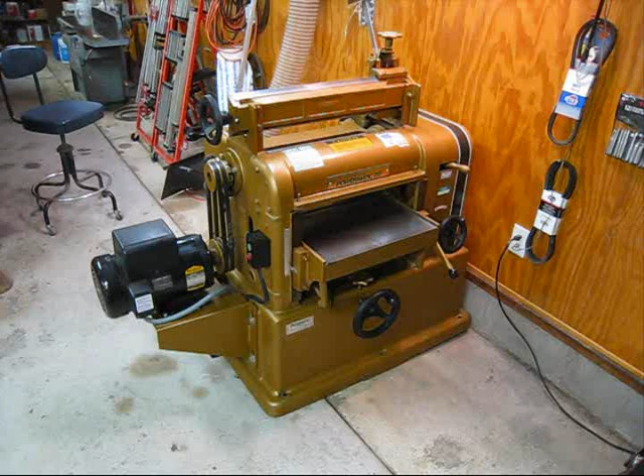Today I'm going to make a video showing how to adjust a Powermatic Model 180 18-inch planer. I recently went through this planer and set new bearings in it. I pressed new bearings on the cutter head, which meant disassembling the machine, taking the cutter head out, pressing the bearings on, and taking the blades out. So the machine's all back together, the new bearings are in, and I just set the knives and sharpened them with the knife sharpener.

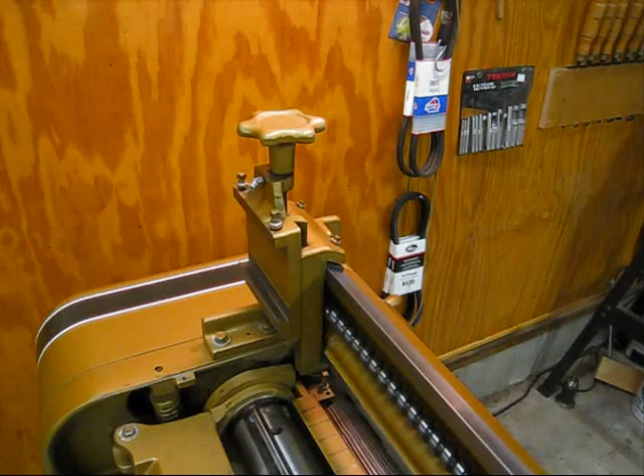So now it's time to go through and adjust all the settings. Every time I sharpen these knives, I have to go through and adjust the settings because it changes just a little bit. That's what this video is about. I'm going to show the different adjustments you can make on this machine to get stock running through there real nice. So I'll take you over to the bench.

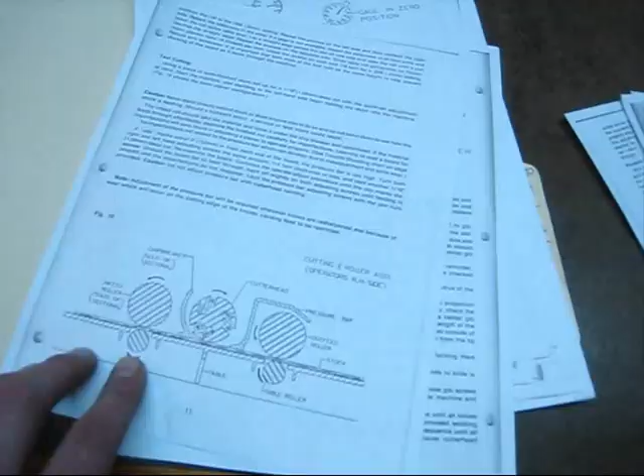I have an illustration here to show you. There's an infeed roller, and the stock goes through this way: infeed roller, chip breaker, cutter head, pressure bar, and then the outfeed roller. There are also a couple of idle rollers on the bottom, or table rollers as they call them. And then I have the settings over here, so I'll take you through step by step and show you how to adjust those.

If they're not adjusted right, you can have problems with stock getting stuck in there, having excessive snipe, or not cutting right. Once this machine is all adjusted, it really cuts nice. It's a really nice planer.

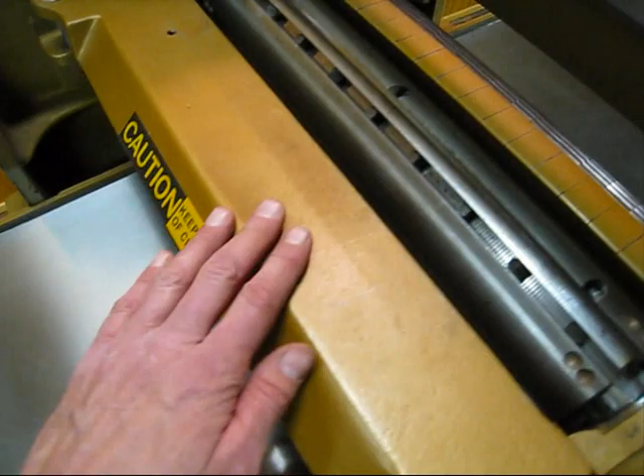So I'll show you here. This is the segmented infeed roller—some of them are solid, this one happens to be segmented. And then here's a segmented chip breaker, the cutter head with the knives in it, and then the pressure bar, which is a casting that extends down right down here. And then the outfeed roller.

Also, the first thing I'm going to adjust is this table, and I'm going to show you how to do that. So I'll stop the camera and get set up, okay?

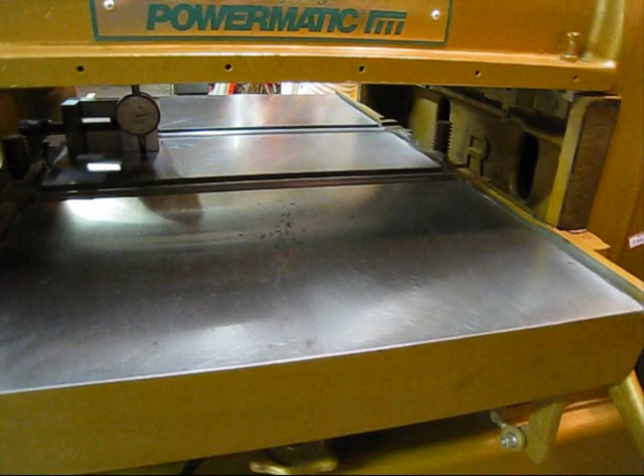Okay, the first thing I'm going to adjust is the table. I want the table to be parallel to the cutter head and the knives. I haven't checked this for a while, but since I replaced the bearings and there's new knives in there that I sharpened, I wanted to check. It wasn't off by very much—about 0.003 from side to side. That's really not that much, but I wanted to go ahead and adjust it anyway.

And I ended up adjusting it the wrong way, so now it's like 6 or 7 thousandths off. I'll go through and show you how to do that.

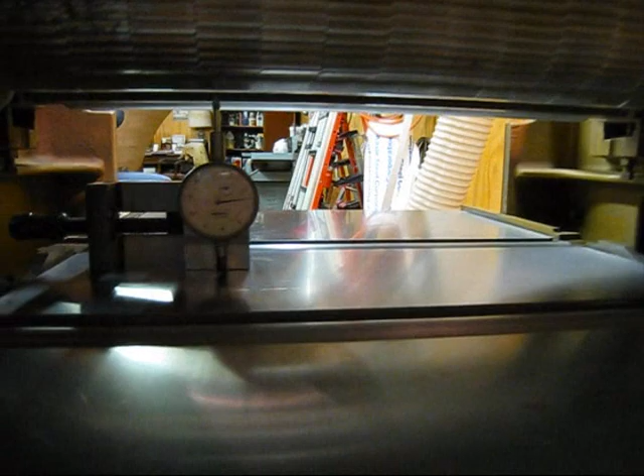I have a dial indicator, and I just have it mounted to a little machinist vise. I'll hopefully get some light in here to show you. What I'm going to do is measure the very bottom of the tip of the blade from side to side. Now the blade doesn't necessarily have to be right at the bottom of the arc, as long as the cutter head doesn't move when I take those measurements.

So what I'm going to do is get the blade where it looks like it's at the bottom of the arc, and then just put a little wedge in that pulley there against the indexing housing, the plunger here, just so it doesn't move, and then take readings from side to side. So I'll get set up and get some light in here, and I'll start the camera, okay?

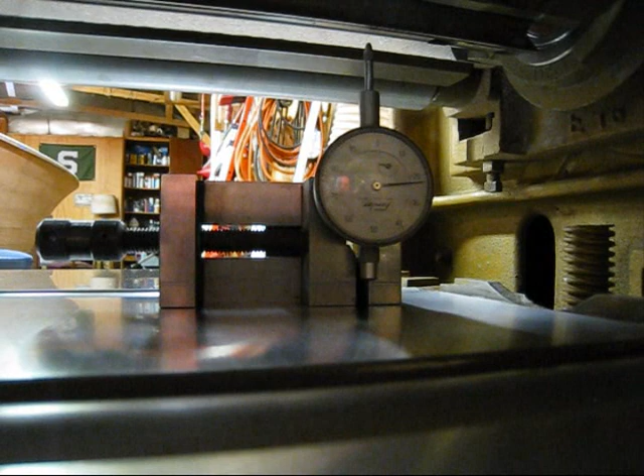Okay, I have the dial indicator set up on the right side, and the cutter head is fixed with that little wedge, and the blade is near the bottom of the arc, but it's probably not exactly the bottom—that's okay. As long as that cutter head doesn't move as I take readings from side to side, it'll be okay. Now, I adjusted it again and went the wrong way again, so it's off even more than before.

I think it was off 6 thou before, now it's like 10. So I'm going to try to get it right this time.

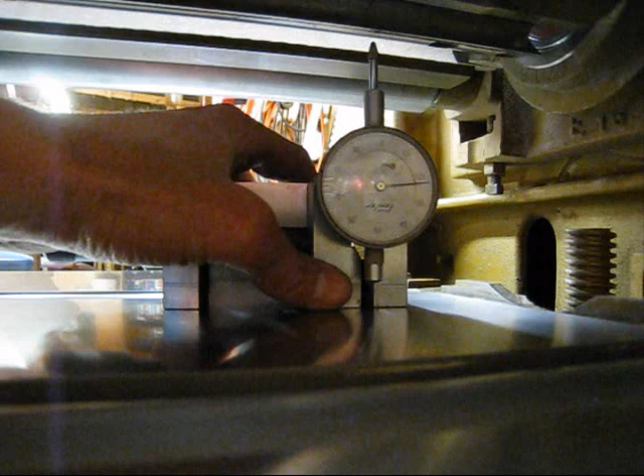What I'm going to do is first raise the bed a little bit until I engage this plunger. Then I'm going to drag the plunger across the bottom of that knife, and we're going to see what the gauge bottoms out at.

Looks like about 78, 79, right around there. So I'm going to slowly move this to the other side. Let's say that was 78.

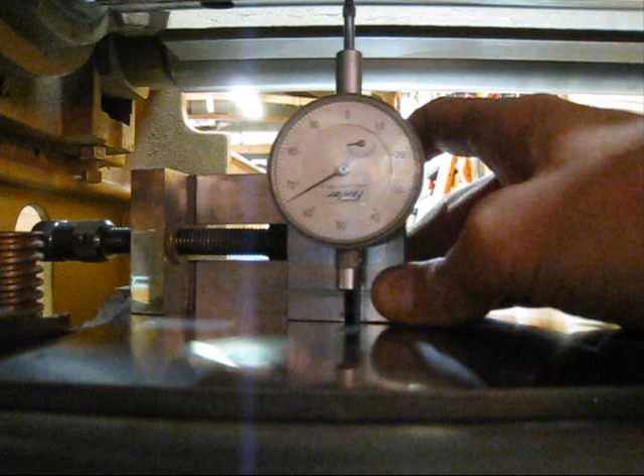Now I'm going to drag it across the bottom of the knife on this side and we'll see what it is. See, that's 68. So this side needs to come up. If I put that at 78, and this side came up, then it would touch there. So I need to either bring this motor side up 10 thou or this side down 10.

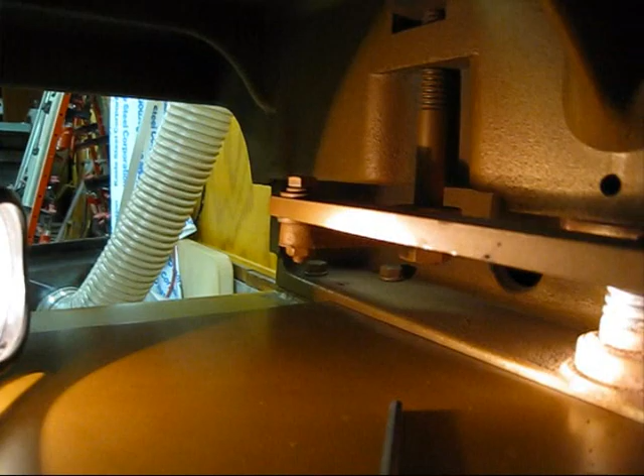I'll stop the camera and get set up to do that. Okay, I'm going to explain how to adjust this bed. I'm going to take the camera under here and show you. This entire table is resting on 2 Acme gears. That's how you raise and lower it. It's the same on the other side.

Right here there's a set screw. If you can see this collar down here, that collar is probably flanged and it probably goes up into this casting, with a set screw right here. Then there are some holes, I think 4 total in this collar, that you could stick a bar into and adjust it. So the first thing I'm going to do is loosen the set screw, and then I can put this Allen wrench in here and adjust this collar up or down.

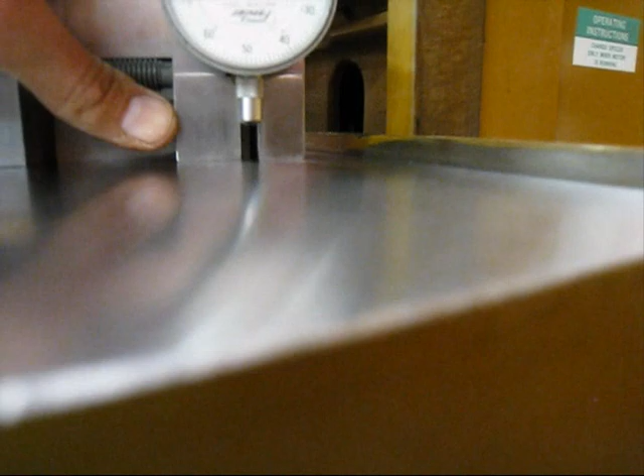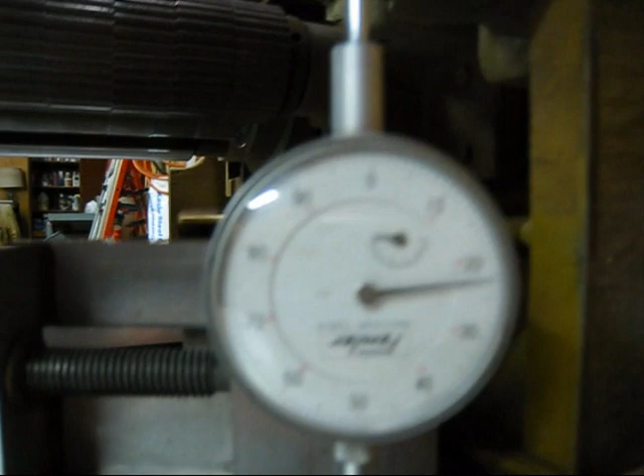But before I do that, I want to set the indicator. I have it set out here because it's easier, and I'm going to raise the bed. Now I'm just going to measure some arbitrary point on the right side of this, and I'm going to raise the table up until that engages. There we go.

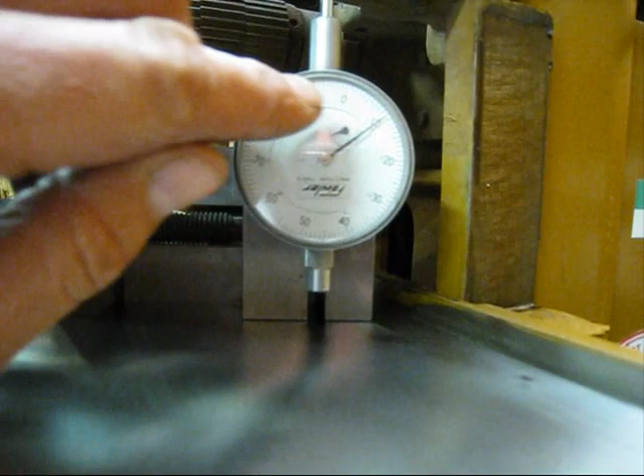I have to drop this side 10, so I'll just set this to 10 right here. That needle is going to move backward, and once it hits 0, that's my adjustment.

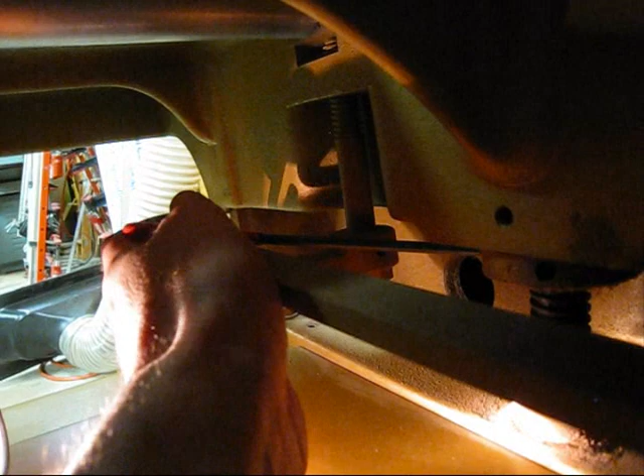So what I'm going to do is go under here, break that set screw loose, and put this Allen wrench in. There's another hole on the other side, because I don't think I can do it from this side. Okay, and I'm going to move this, start moving it until this needle drops. I'm going to set the camera right here.

And when that needle starts to move, I'm going to start adjusting it. Okay, there it goes. I'm going to slowly move it until that gets to 0, and it's dropping the table. Right there.

Now I'm going to go in here and just tighten that set screw, watching the needle to make sure it's not moving. Okay, so that set screw is tight. The needle moved just a touch, but it's pretty close.

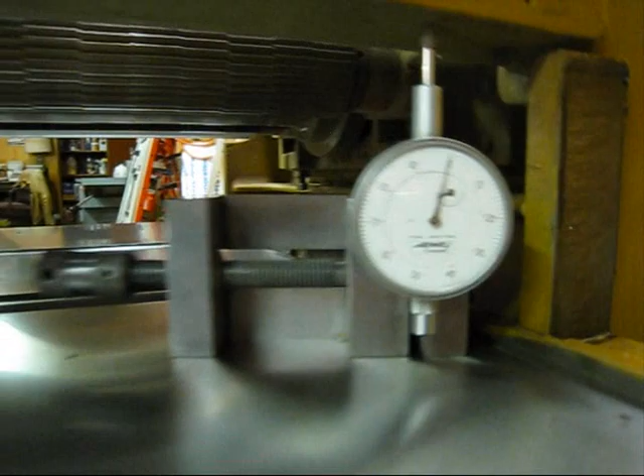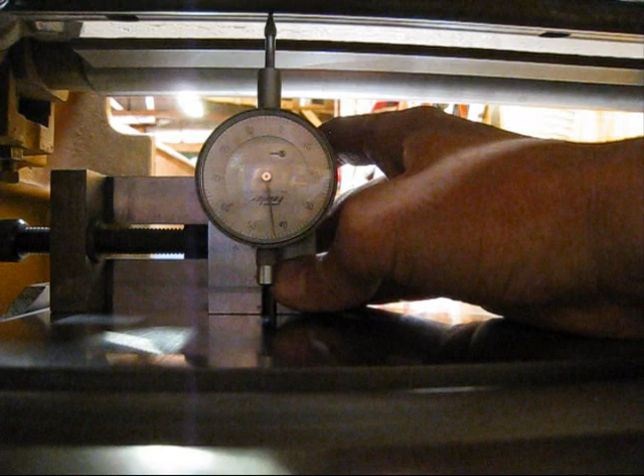I'll stop the camera and then we'll take our readings again from side to side. Okay, I have the indicator set back up. I'm going to take a measurement on this right side, dragging the plunger toward me so it hits the knife, and we'll see what it reads. Right there, starting to drop, 52. I'll slowly drag this over, and then we'll do it on this side. Just under 53, so that's it, within 1 thou from side to side.

So that's how you adjust this bed. I'm just going to go down there one more time and make sure both of those are tight. And now the bed is parallel to the cutter head and the knives, okay?

Now that the table or bed is parallel to the cutter head and knives, it's time to make the adjustments. There are 4 things I'm going to adjust: the infeed roller, chip breaker, pressure bar, and the outfeed roller. On my machine I happen to have a segmented infeed roller and segmented chip breakers; some other machines have solid ones. I usually do it in order: the infeed roller first, then the chip breakers, then the pressure bar and the outfeed roller. The reason, at least for the infeed roller and chip breakers, is that the chip breaker actually rests on that infeed roller, so you want to adjust the infeed roller first.

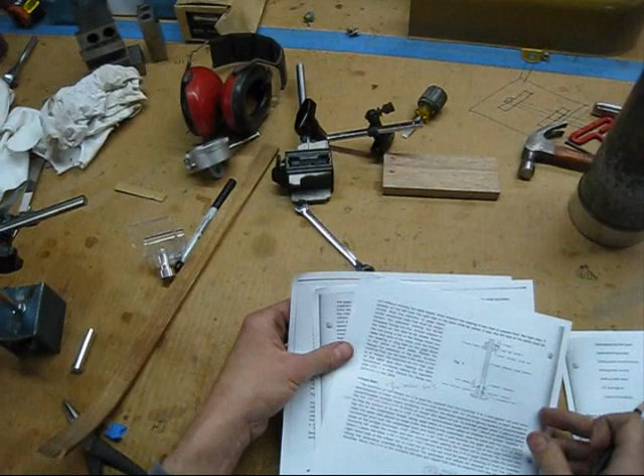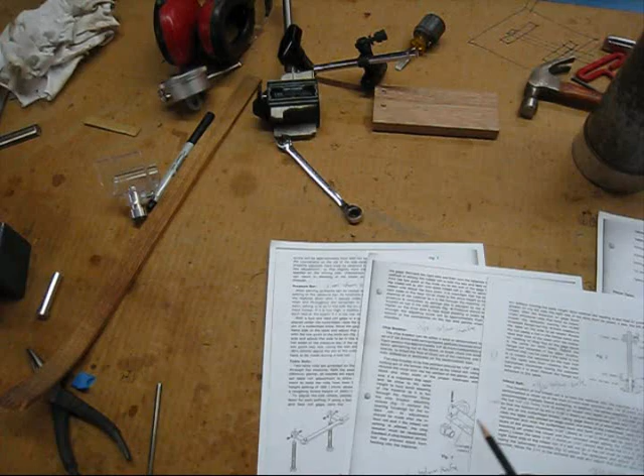So I'll take you over to the manual here. There are 4 things I'm going to adjust, starting with the infeed roller, chip breaker, outfeed roller, and pressure bar. The infeed roller, outfeed roller, and chip breaker are all going to be set slightly below the knife, the very bottom arc of the knife. The only thing set just slightly above is the pressure bar, about 1 thou above the knife. So everything has give to it except that pressure bar. The infeed roller is mounted on springs.

See that it's mounted on springs. And the chip breaker, these individual, sectionalized ones, they're also mounted on springs, and could also be lifted too. So that's got give to it. And then the outfeed roller has give to it. The only thing that doesn't is the pressure bar, and that's probably the most critical one.

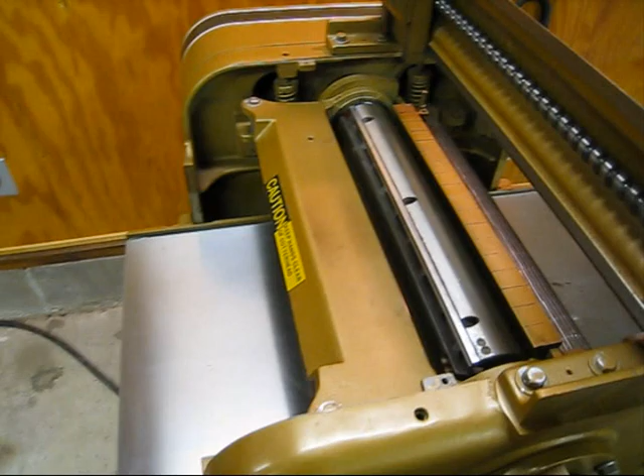I've read articles where if something's going on with the machine and it's not cutting right, usually it's the pressure bar that's not set right. The pressure bar's job is, as the plank comes through here and passes through the cutter head, before it gets to the outfeed roller, the pressure bar holds it down until that outfeed roller can pinch it and pull it through and hold it down to the table.

So if this is set too high, you're going to get a washboard effect on the plank. And if it's set too low, the plank will just stop - it'll hit it and just stop. So you want to set the bottom of that just slightly above, like 1/1000th above the cutter head, or the knife, at the lowest arc.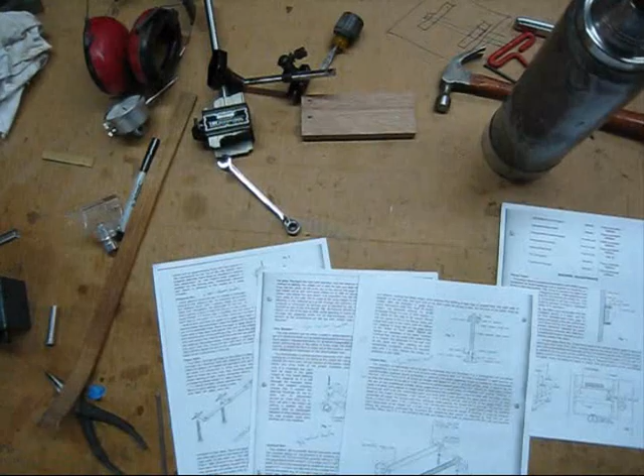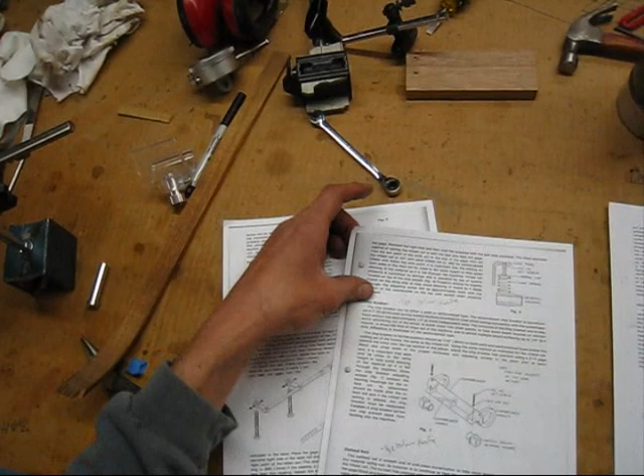So we'll talk about the amount of adjustment. The infeed roller on my machine, with the sectional infeed roller, is going to be set 1/16th below the knife. On a solid one, it would be 1/32 - it says right here on the solid types, 1/32. Then the chip breaker, that's also going to be set 1/32 below the knife.

Outfeed roller, same thing, and again that has a little bit of give to it. The infeed roller and outfeed roller have give, as well as the chip breaker. And then the pressure bar is going to be 1/1000th above the bottom arc of the knife. So that's the specs. The first thing I'm going to do is adjust this infeed roller. So I'll stop the camera and get set up for that, okay?

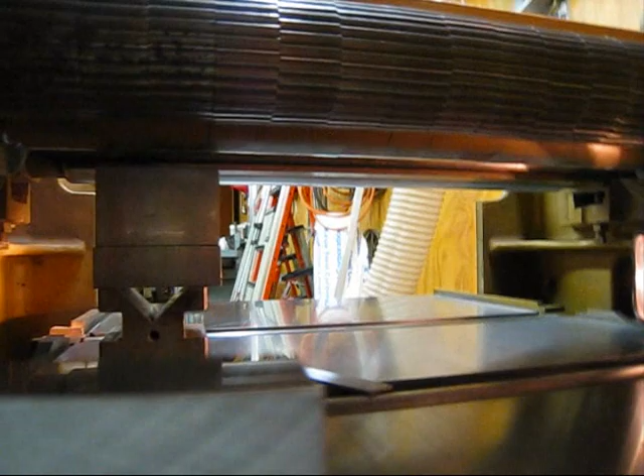Okay, now it's time to set this infeed roller. The infeed roller needs to be 1/16th of an inch below the bottom of the knife, at the bottom of the arc. So I like to use these blocks here instead of indicators - it's easier, I think. So what I did was I set some blocks up there, and I have a little scale here that's exactly 1/16th of an inch, and I'm going to put it on top there.

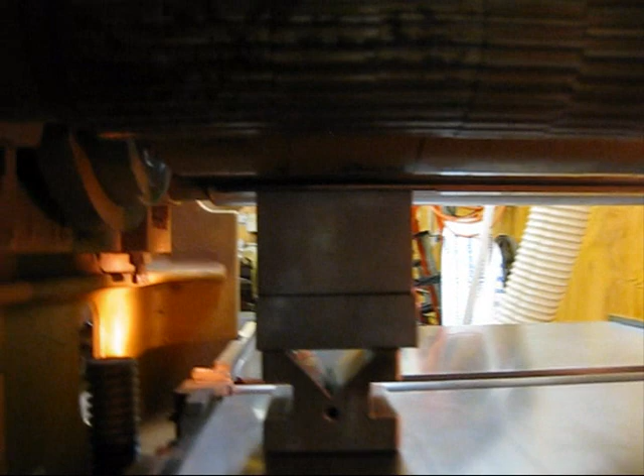Now I have the blocks centered, just by eye, under the knife, and I'm going to move it a little bit, and let's see if we can see the knife there. What I'm going to do is rock the cutter head back and forth, and move the table up real gradual, sneaking up on it until that blade just barely hits the scale. So I'm going to start moving it up.

Right there, I could hear it. But there's probably a little bit of spring to that scale, so I'm going to just go a little bit more. Now it just stopped it, so I'm going to back it off just a touch. Can you hear that? Okay, that's right where I want it. So I'm going to lock the table down.

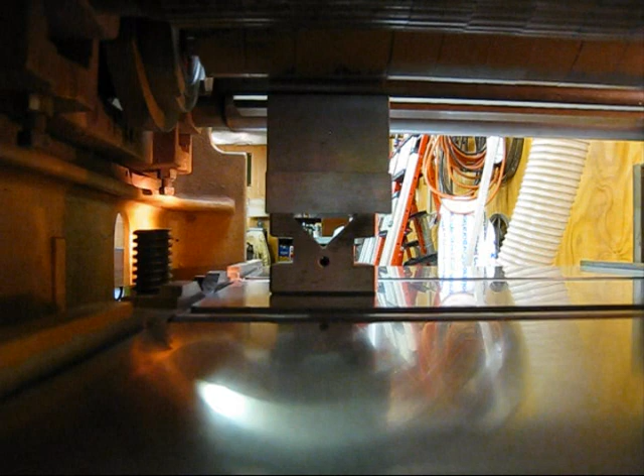And I'm going to get my scale out. I can rotate the cutter head now, and I'm going to get these blocks out of there. Now I'm going to set the infeed roller to these blocks. I was already messing around with that infeed roller, that's why it's kind of way off. Now one thing you have to keep in mind: this table roller, I have this lever all the way up, so that table roller is not above the surface of the table. You don't want that hitting your blocks as you're taking this across there.

So now it's just a matter of setting, I'll get the light over here, setting this infeed roller so it just touches the blocks. You do that with a bolt and a jam nut right there, and another one on that side. So I'm going to break that loose and start lowering this infeed roller from side to side until it just touches my blocks. And once that happens, it'll be 1/16 below the knife. Okay?

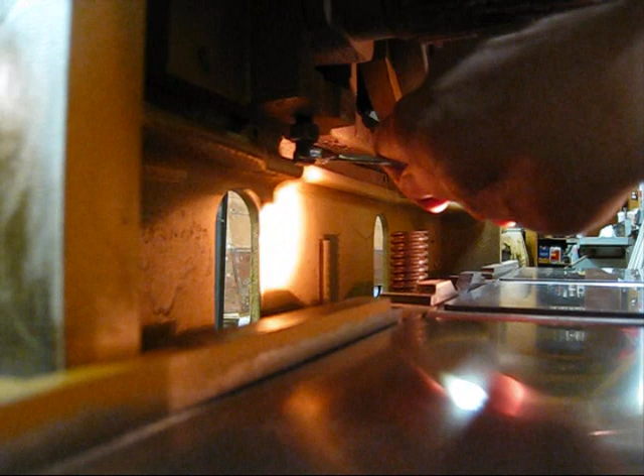Okay, I want to lower those rollers, so I'm going to back this bolt out. It's a 3/8 wrench that you need for that, and a 9/16 wrench for the jam nut. So then I'll take my blocks over here. Oh, that's real close. I might have to go back up a little bit. So I'm going to adjust those until the block just goes under that infeed roller, okay?

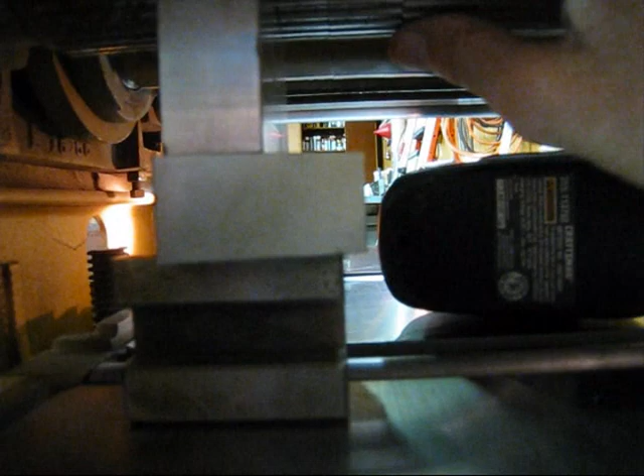Okay, well that wasn't hard. The block just goes under there, and I went ahead and tightened down the bolt and the jam nut. Now these rollers, the sections, are spring loaded, so the ones that the block is going to go under, I kind of press a few times just so they're relaxed where they need to go. And you can see that block just fits under there - you can hear it. Okay? Now the chip breakers and the outfeed roller are set a 32nd below the cutter head.

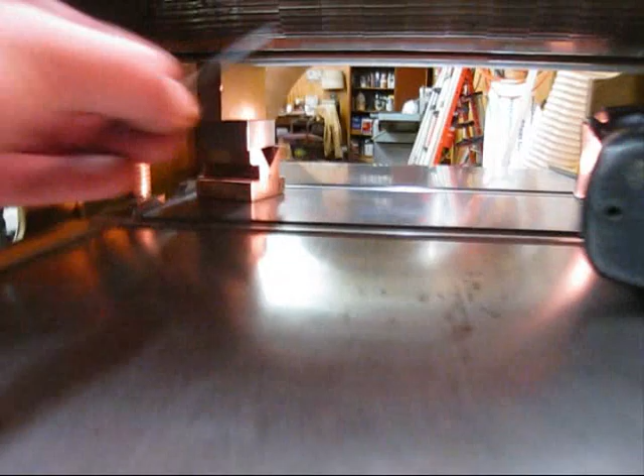I'm going to place my blocks back under there, and I have two feeler gauges, 17 and 14 thousandths, which add to 31 thousandths, or about a 32nd of an inch. I'll set that on top of the block and raise the bed until the knives just hit those feeler gauges, then adjust the chip breakers and the outfeed roller.

This is the same setup as when I used that ruler that was a 16th of an inch thick. I raised the bed up until the knives hit those feeler gauges, and now it's time to set the chip breaker. The block is set here, and I'm not going to have to move this at all—the blocks go under there just perfect.

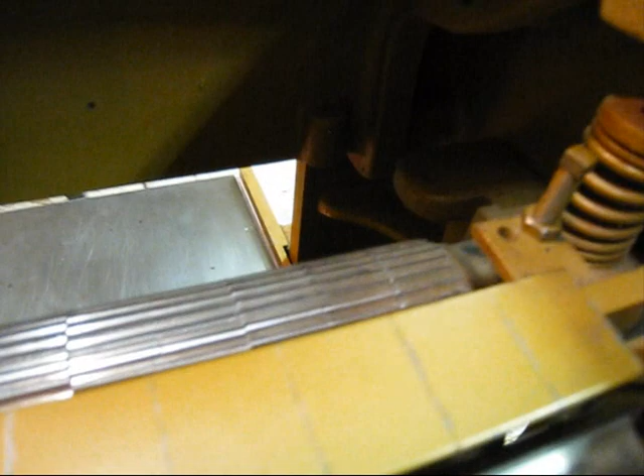If you did need to adjust that, I'll show you up here—these are the chip breakers. There's a bolt with a jam nut, and this rests on the infeed roller. It's just a matter of adjusting those and then tightening the jam nut. But they're good, so I don't have to adjust those.

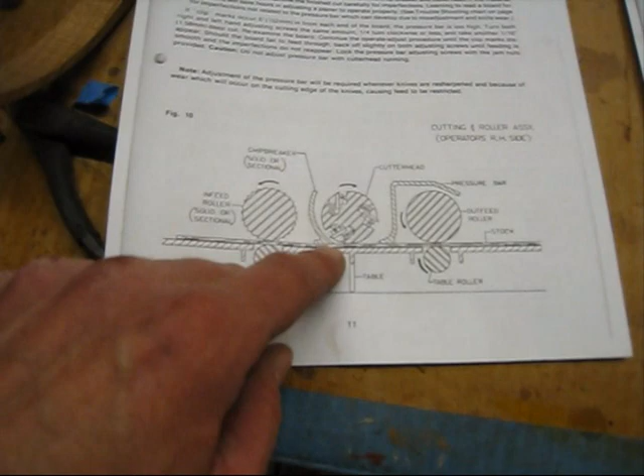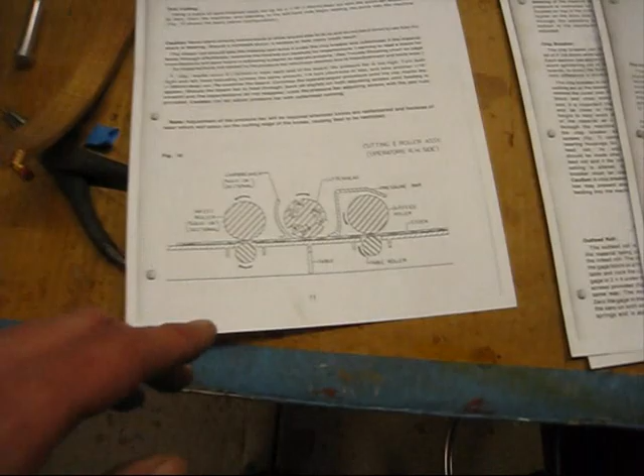One thing real quick about the chip breaker: its job—they're spring loaded and meant to ride on the plank as it comes into the cutter head. I'll show you on the illustration over here. As the cutter head rotates and the knives dig into the surface of the wood, it starts to curl up, and the chip breaker is resting right on the piece of wood. That's what breaks the chip, the very bottom of that chip breaker. As it's resting on your plank, it breaks that chip, and that's why you get all those little curlicues in your dust collector.

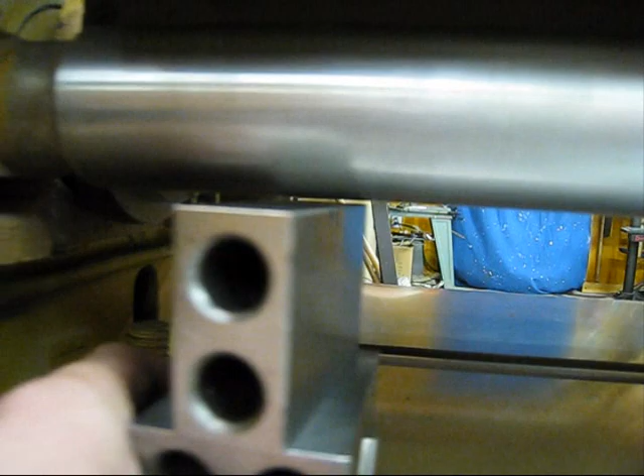I'm at the front of the machine now, and it's time to set this outfeed roller, which is again a 32nd of an inch under the arc of the knife. This has to come down quite a bit, looks like—see that gap in there?

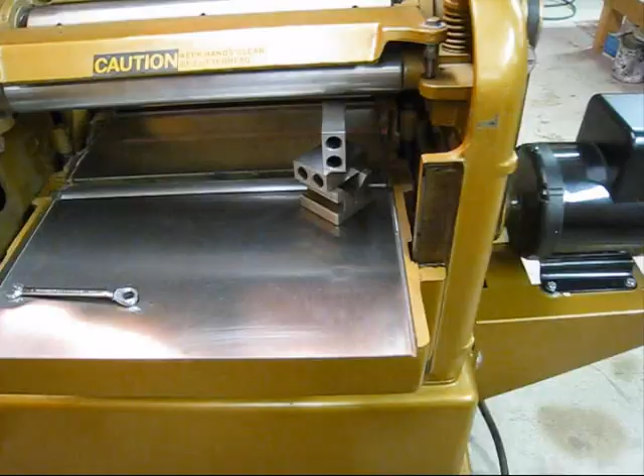It's the same type of adjustment. I'm going to back that jam nut off and the bolt, and just back that out until this outfeed roller hits the block. This will be less vague than the first two, because those had a little bit of spring associated with them. This one we'll know once it's right down on there. Okay, that didn't take much to adjust. So I'll just show you the blocks—they just barely go in there, and when I try to lift up on the block, it won't. There's no clearance.

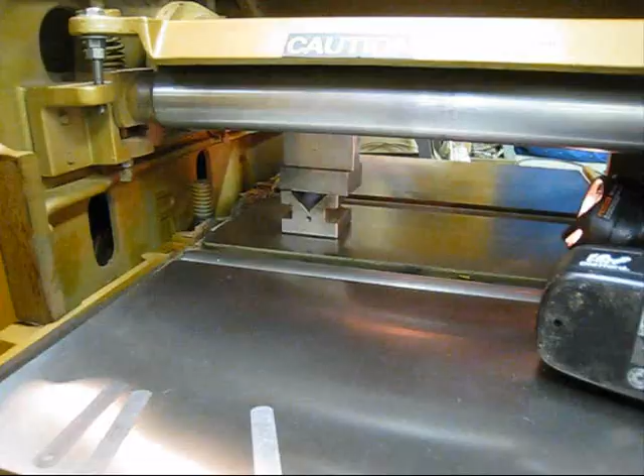That's set just right, so I'm going to move the blocks aside and tighten this up a little, and tighten up the other one too. I tightened down the bolts on the outfeed roller, and now we're on to the last adjustment—probably the most critical for the performance of your planer—and that's this pressure bar up here.

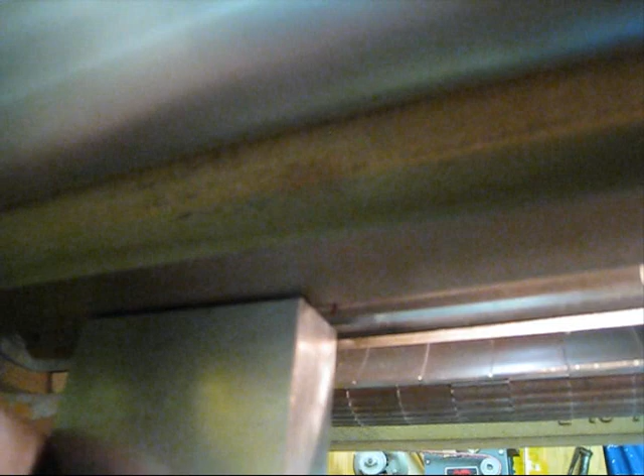Let's see, where is it? It's right, the surface is right here. Now, I haven't moved the table at all, and you can see that it needs to come down. We want to set this pressure bar about a thousandth above the bottom arc of the knife.

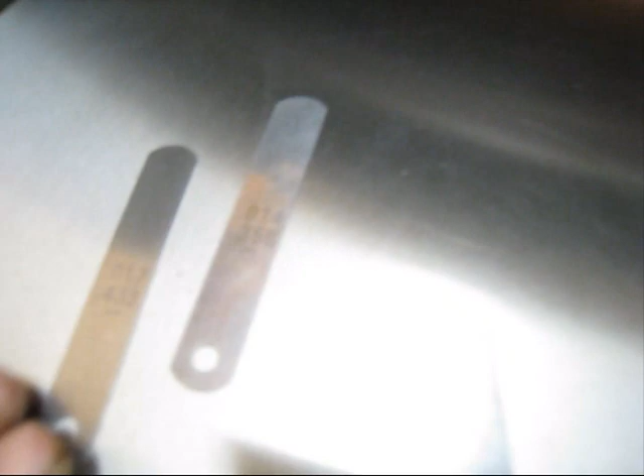If you remember, when I set this table, I used those blocks and two feeler gauges, which equaled a 32nd of an inch, or 31 thousandths. So what I'm going to do is replace the 14 with the 15, and put them in between this block here, and that's going to raise it up—that's going to be 1 thou above the bottom of the knife. I'm going to set the camera down.

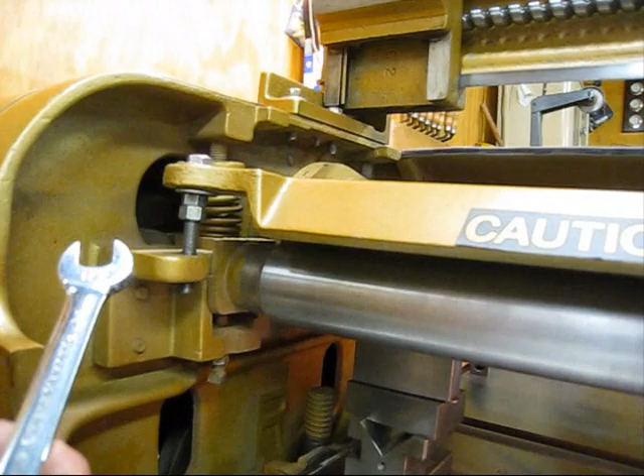Instead of putting them on top, it's easier to just put them down below here like this, and then move this over—you can see there's a little play there. So what I'm going to do, you'll need two 9/16 wrenches, and I'm going to loosen these up and adjust side to side. Okay, the jam nuts are backed off.

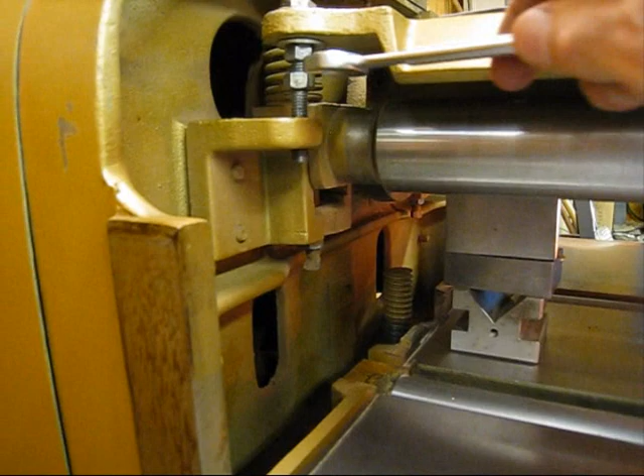This needs to come down. I'm going to set the camera up here. So what you do is loosen the bottom one up just a touch, and then start to lower that until you creep up on it. That moved, so a little bit more.

Just a touch more, so that's the process. You back this out a little bit, and then you're drawing this down. I'll do the same thing to this side until that pressure bar, the bottom surface of the pressure bar, is nice and snug on my blocks.

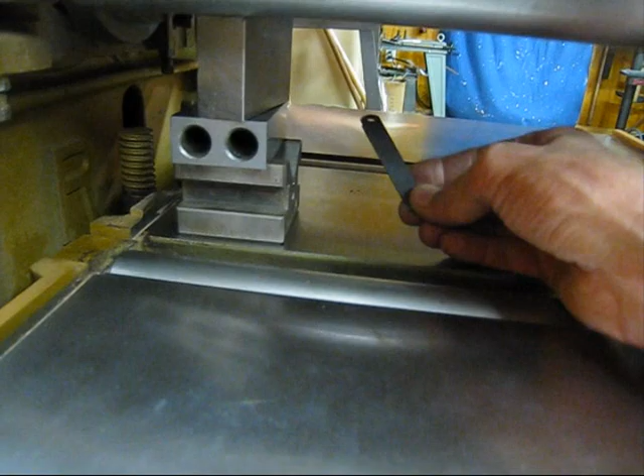Okay, the pressure bar is all set now. My blocks are under there, and I put my feeler gauges under there, and it's just snug on both sides. So that should be set just above the bottom arc of that cutter. I tightened these two up first, and then these two against each other on both sides, so it's all set.

Now I wanted to talk about a little problem I had setting this. I would set it, move my block over here, set it, come back over here, and then all of a sudden it was too tight, and I kept getting false readings, and I couldn't understand what was going on until I finally figured it out. I'll take you over here and show you.

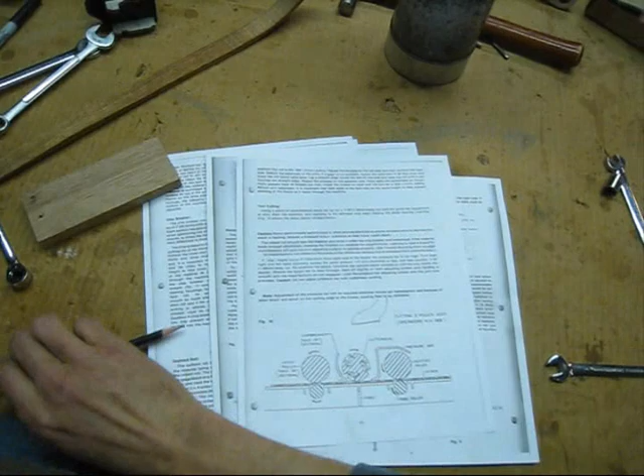This is the pressure bar right here, and that surface that actually runs over the wood is pretty wide, about 1 inch wide from here to here. It's not totally parallel to the bed.

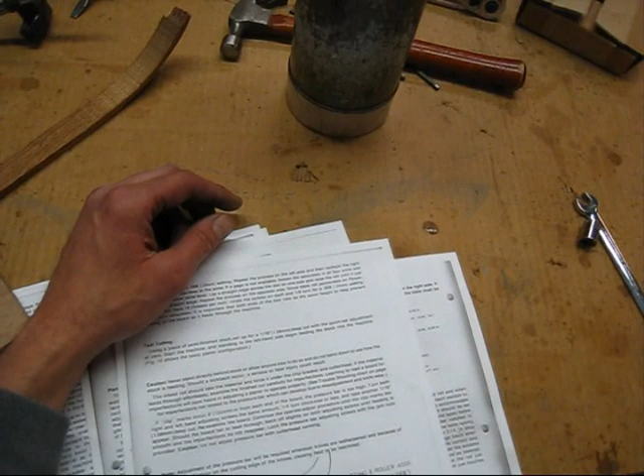So when I was putting the feeler gauges and blocks under it, I was putting them on the higher side with the plank going this way. What I really needed to do was put them right at this leading edge where the plank comes through first, because it's not exactly parallel. It took me a while to figure that out, but I finally got them adjusted on both sides.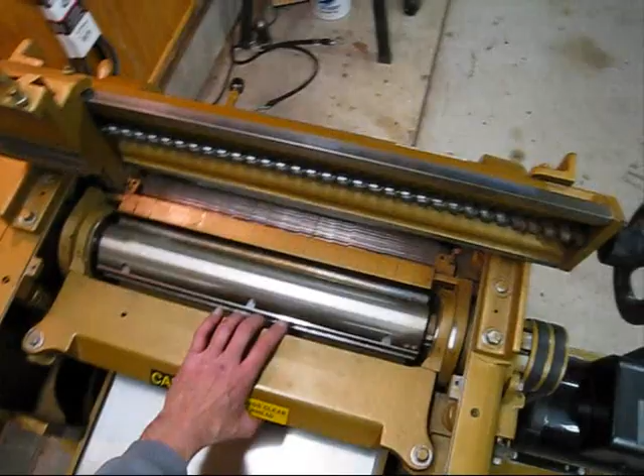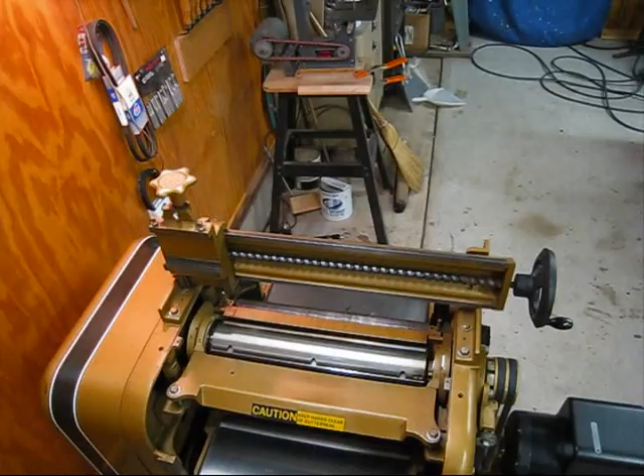So it's all set now. After all of that, as far as the pressure bar is concerned, you still need to run the piece of wood through there. Sometimes after going through all that, you run the wood through, and usually I have it set a little on the low side and the wood will hit it and stop. If that's the case, I don't even get the blocks or feeler gauges out. I just back this off just a little bit.

I just barely bring this up a little at a time until that plank comes through there. That's happened to me a few times, but I've never had it so sloppy that the plank was getting that washboard effect, bouncing up and down before the outfeed roller could grab it.

So everything's adjusted now. I'm going to go through, put my blocks away, blow the machine off one more time, and put a little paste wax on the bed. I'm going to put the guards back on and run a plank through it. Okay, I'm ready to test out the planer.

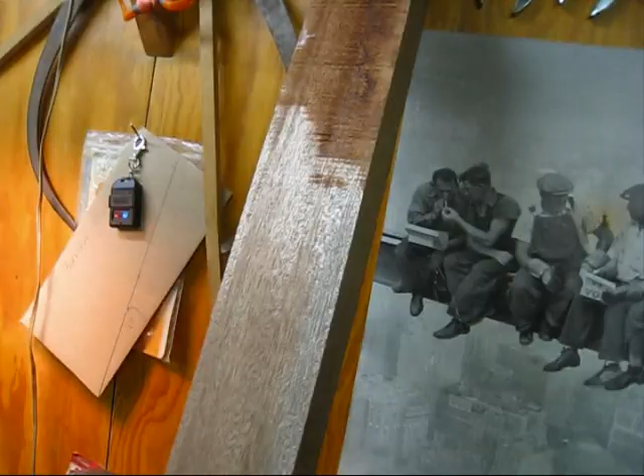I have a piece of rough sawn mahogany here. This side's rough, and this side looks like I ran it through the jointer previously. I'm going to run it through the jointer again to straighten out the ends anyway. So I have the dust collector going.

On the ends, but that'll be okay. It's about 2 inches. Sometimes with planks like this, they're a little bit wider on one end, like down here. So I'll set it for just a little over 2 and see what happens.

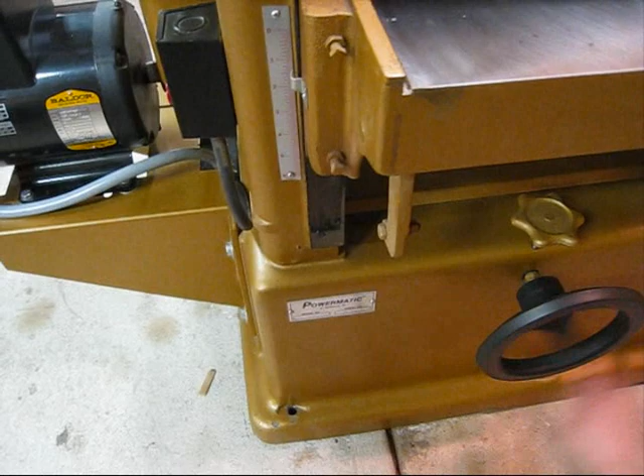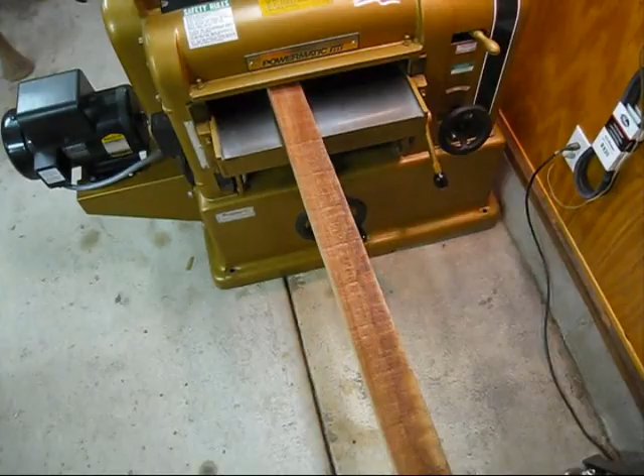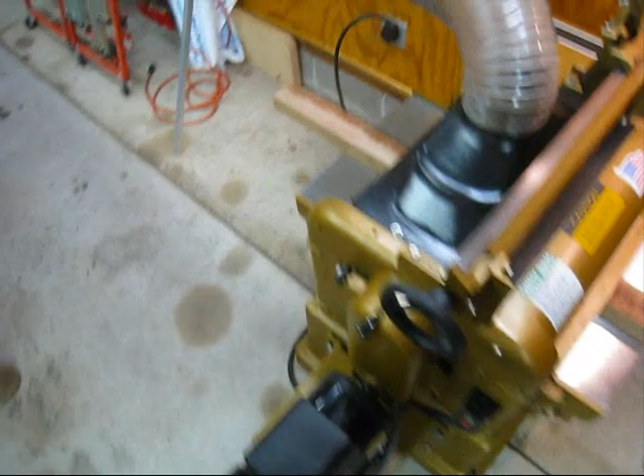I have to switch open this gate. It's going to start cutting down here probably. Seems to work great, really seems nice. The end is sniping right now because of this right here.

Let this piece through and check for snipe. There's my tape. So this is at 9/16 right now. So I'll go up to 1/2 inch, I'll take a 1/16 off of there.

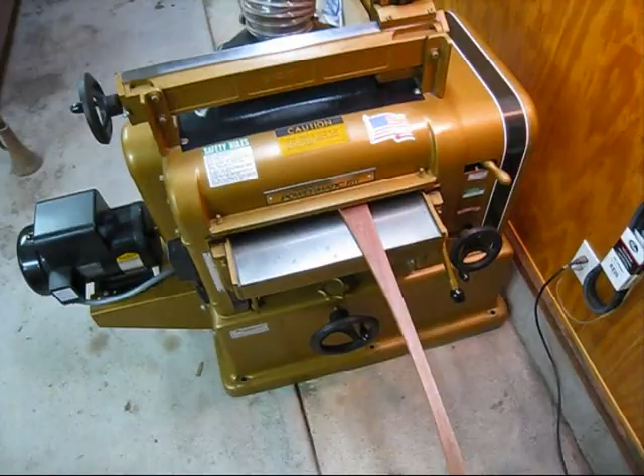No snipe at all on there. A lot of times you'll get it on both ends. I'm going to flip this over and take a little bit more off.

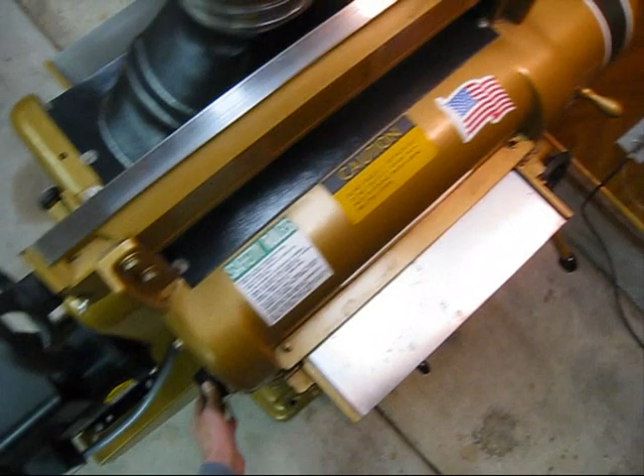Well, I'd say she's totally adjusted now. There's no snipe at all on the ends there. It's cutting really smooth. Looks good. Okay, so that'll do it for the video on how to adjust a Powermatic Model 180.

Okay, there's one more thing I want to check. I'm going to run this wide piece through. This is a scrap piece of mahogany I have here, almost 15 inches wide. I'm going to run this through and then mic the edges and see what I get.

Now this came right from a lumber mill. They planed down 4/4 to get this half. And I'm going to mic it right now and we'll see how good it is side to side. So that looks like it's about 3 thou over a half inch there. And that's about 13, so it's a difference of 10 thou from side to side.

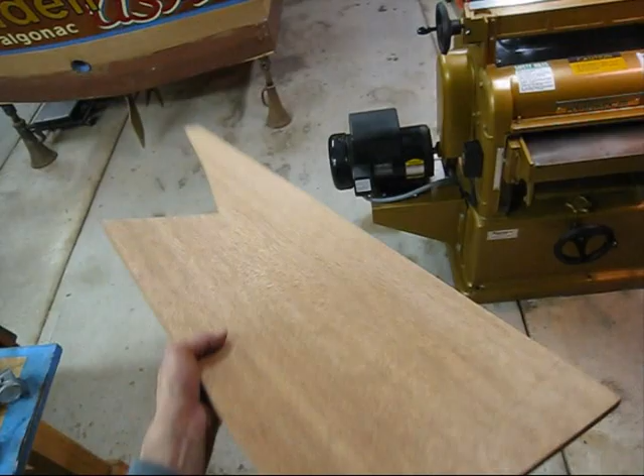So I have the planer set at just under a half inch, and then I'm going to flip it over and raise the bed and hit it again. I'm just going to kind of kiss both sides of this, and then we're going to see what we got, okay?

No snipe at all. I'm just going to raise this up just a little bit. Still no snipe. Okay.

That is 0.447. .446, look at that. .446, so that's pretty good, just 1 thou from side to side. That's really cut nice.

Okay, so that'll do it for this video.